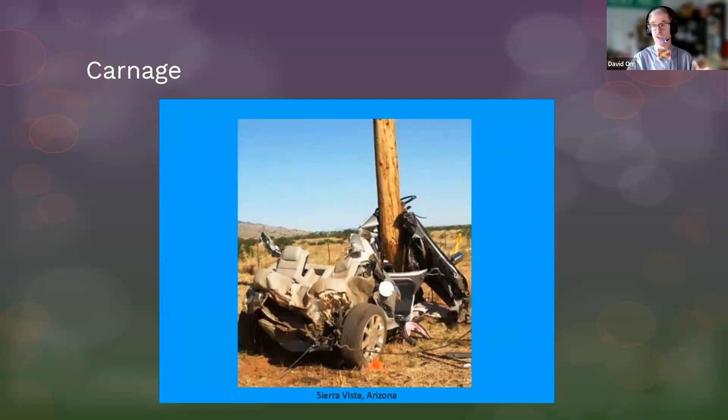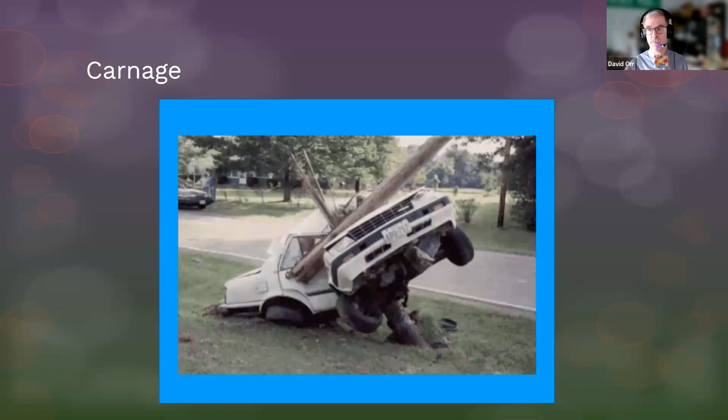And yet the funny thing is, or the sad thing is, depending on how you want to look at it, most of us don't think about this on a daily basis. And yet there are still people thinking about plane crashes that have occurred weeks and even months ago. We tend to focus on the big events, and yet these small events that lead to fatalities and serious injuries change people's lives, and the numbers aren't where we'd like them to be. So that's really the goal, everybody getting home safely every single day.

Now, if you go to both sessions, what are you going to be picking up and learning? Well, I'm hoping you're going to be able to describe the roadway departure crash problem, and we'll talk about why I've highlighted the word crash here in a minute. I want you to make sure you understand the concept of systemic safety. We're going to talk about other approaches, system-wide approaches, and hotspots and site-specific things, but the systemic safety one is definitely one I want to make sure is in your toolkit that you're aware of.

And then discuss the countermeasures to reduce the potential for leaving the roadway, which is our first choice. If the vehicle does leave the roadway, we want to reduce the potential for an actual crash. And then if there is a crash, we want to minimize the severity. Okay, that's our goals if you go to both sessions. Today, we're going to focus really on the first idea, but we are going to briefly touch on the others as well. And again, what's our number one goal? Everybody getting home safely every single day. That should be our goal.

You've heard the terms towards zero deaths or vision zero. There's other terms that are used out there, but they all have the same idea. Everyone should get home safely every single day.

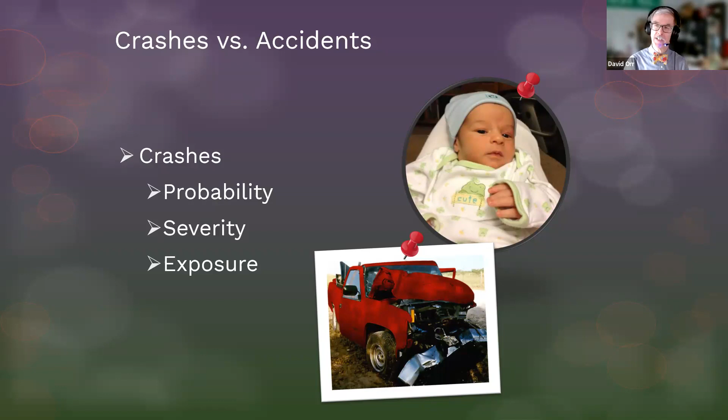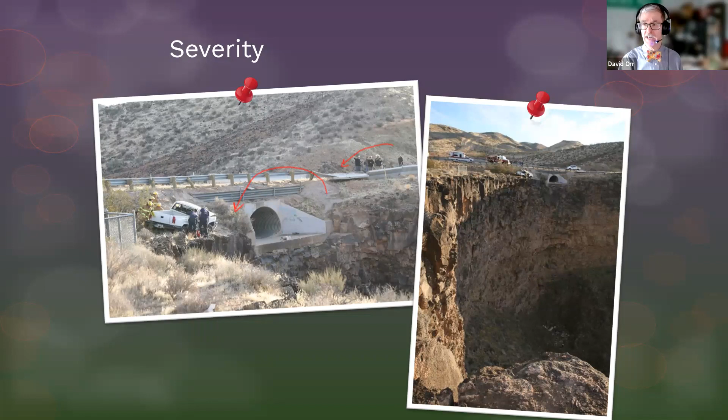Okay? And then finally, exposure. Exposure just means traffic. Okay? It really just means what the amount of traffic is. But the reason we say exposure is because it also deals with the fact that there might be people outside of a vehicle who, if they're involved in a crash, are much more likely to have a severe injury or fatality. So if there's pedestrians involved, workers, okay? I see there was another crash on 81 where someone hit an attenuator yesterday or the day before. Again, we worry about exposure, but it's a form of traffic that we're dealing with as well.

Okay? Now, what are we dealing with in terms of fatalities? Well, here's a sad map. It's a map I really wish I didn't have to show. It's the number of fatalities in the United States on an annual basis. Before COVID, that number had dropped down to almost 30,000. It was in the 31,000 range. That number has jumped to over 40,000 fatalities per year, and obviously the serious crash rate's even higher. And even here in New York State, we had a bit of a jump. So that average went up.

Okay. We want that number to be down. The real answer should be zero. We really want everybody to get home safely every single day. It may not be feasible. There may be reasons why not, but let's talk about what we can do to get that number at least back down to where it should be and headed in the right direction.

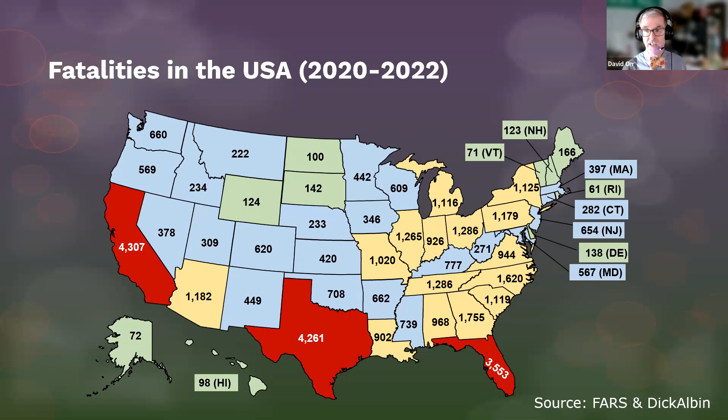Now, the Federal Highway Administration has a crash focus area that has not changed. I was at a meeting in Kansas City last week. There's not a change in that as far as the safety folks are aware. There are some restructurings, but they're still going to focus on roadway departures, intersections, and bicyclists and pedestrians, i.e., people who are not inside a piece of metal, that, if they're involved in a crash, are much more likely to have that severe event. Okay?

And this makes perfect sense. The reason for roadway departures has to do with percentages. Intersections tend to be a lot of interactions with bicycles, pedestrians, and the kind of crashes which are the most severe. And then finally, bicycles and pedestrians because of that, again, vulnerable issue. So what do we deal with in terms of roadway departures? Why did New York State put their first safety action plan in this area? Well, it has to do with percentages.

If you look at the number of fatalities that are due to roadway departures, these again are statistics from 2020 to 2022. Okay. So COVID and coming out of the COVID period. And as you can see, nationwide, almost half of all fatalities are roadway departure fatalities. Okay. And even in states like New York, which have a little bit lower percentage, partly because of a lot more pedestrian and intersection issues in the cities that we've got, it's still a pretty high percentage, 44% of the fatalities. So we'd really like that number to be down, and that's where we're going to focus.

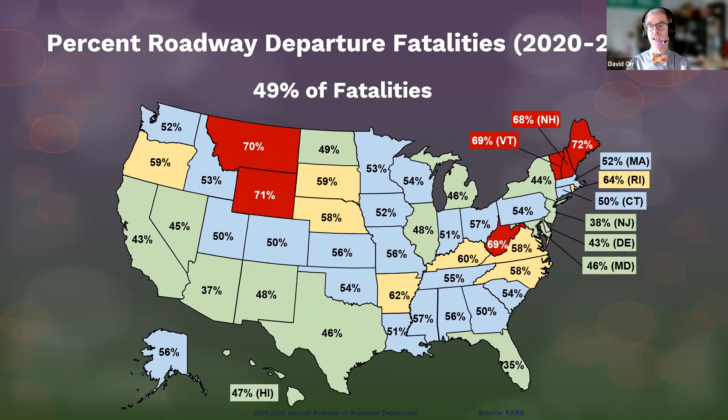So if we look at those data, now this is an interesting one. This chart, which shows the breakdown of crashes based on those three focus areas plus those that were not included for whatever reason, those percentages have not changed. I was actually stunned by this. I'm like, there's got to be something. I went through the data twice. The percentages have not changed within the numbers we were given. So in other words, even though more went up, they went up

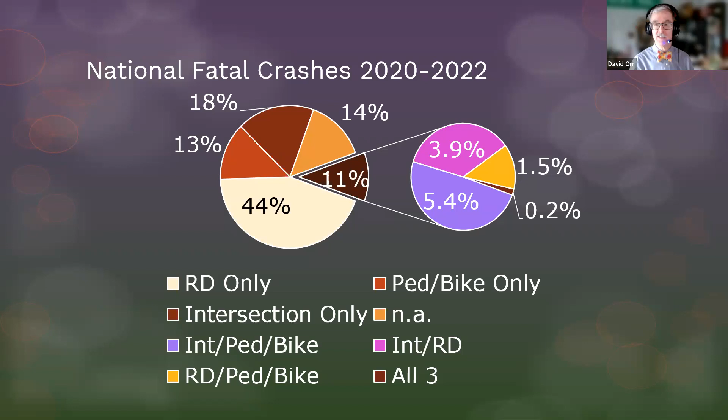So let me define it. This is a definition from the Federal Highway Administration. New York State is very, very close to this. Okay. They are moving to the same definition. It was different, more of a lane departure. But a roadway departure crash, per the Federal Highway Administration, is a crash in which a vehicle crosses an edge line, a center line, or otherwise leaves the traveled way. Now, on a multi-lane road that actually means that they move from one lane to the other in an uncontrolled way, by the way, just so you know. We're going to show you some examples of that here in a minute.

And if we look at the roadway departure fatalities, that includes head-ons, people crossing the center lines, rollovers where they go off the edge of the roadway, hitting trees, poles, barriers, other fixed objects, other roadside things that are not man-made. And then, of course, there are some fatalities which don't get classified. There's the classic other. Okay. Notice there are three really big areas that we care about. Okay. The head-ons, the rollovers, and hitting trees. But we do worry about other fixed objects as well.

So what does that mean by head-on? So this is a roadway departure crash that occurred in Arizona. Okay. So the person had a medical problem, and they wound up in a very, very severe crash. Nobody on the bus was hurt, but the person in the vehicle was severely injured. Okay. That is a roadway departure because they went over the center line and it was a head-on. Okay.

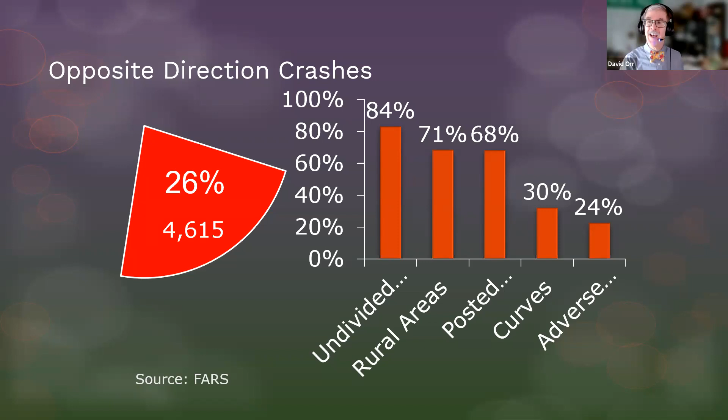Opposite direction crashes are something we want to focus on. Now, in terms of roadway departure, here's a roadway departure. Vehicle left the roadway. We'll come back and revisit this particular roadway departure a couple more times, but that's a roadway departure crash. They ran off the road into the snow and stopped, walked away. They left the traveled way completely, and they hit something.

If I say rollover, a rollover could occur going off the road or even staying within the roadway mostly. In this case, the person swerved a little too hard when somebody swerved in front of them, and they rolled 17 or 16 or whatever the number is times. I counted it once - let's just see, 1, 2, 3, 4, 5, a lot. But because of the vehicle they were in and they were properly seat belted, they walked away with minor injuries. Something to keep in mind when we come back to that in a minute.

A lot of times we might call that a lane departure, but under the definition we're talking about today, that's a roadway departure. Even if they'd stayed in the actual pavement, we'd still count that because it was an uncontrolled leaving of the lane.

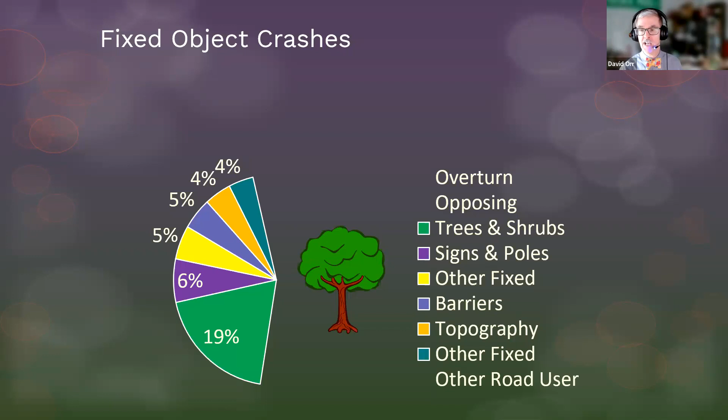The single most common struck object that leads to a fatality is trees. They're 45% of the fixed object fatalities, so we really want to focus on them. When we look at the statistics, like you might expect, two-thirds occur in rural areas, but one-third occur in urban areas. And it's not necessarily a speed issue. Now, it is a car issue, as you can see, about two-thirds with cars. But posted speed of 50 and above is about half, and posted speed less than 50 is about half. So low speed is not necessarily a guarantee with trees - if they're in the wrong place, even a relatively low speed can lead to a fatality.

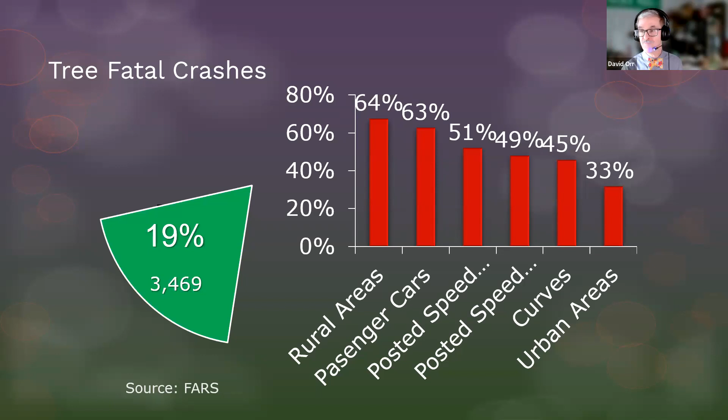And of course, as you'd expect, curves - again, a third of them occur in urban areas.

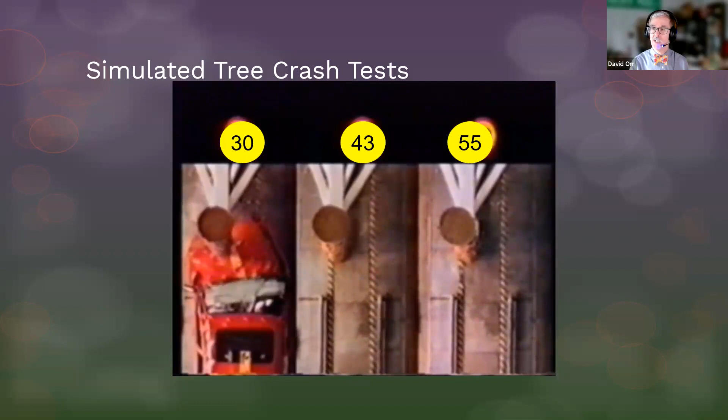So some simulated crash tests, and we will revisit this next week when we talk about some of the crash safety things we can do. But notice what happens - we've got three speeds. It was done in Europe, so the speeds are 30, 43, and 55 if you convert them to miles per hour - Sweden, if I remember correctly. Notice what happens in the penetration of the vehicle after it hits the tree. The reason trees are so deadly is because they're almost rigid when you hit them if they're big enough, and it can penetrate deeply into the vehicle itself. If you hit it at 55 miles an hour, you can see the penetration - it's well into the driver's seat.

My first boss when I worked at Yates County, before I came to the LTAP Center local roads program - I was the deputy over in Yates - my boss, who was the highway superintendent, once fell asleep and literally drove through a tree. Luckily, in his case, it was the right side, and he cut the car in half, and he walked away. Two feet to the left, he's not here with us. So that's how dangerous trees are.

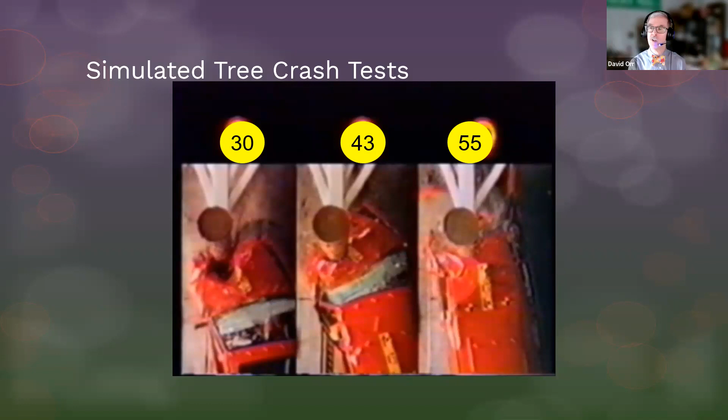So let me just ask, we can get you all working a little bit here. Have you ever been involved in a roadway departure crash? You can check all four of these - a head-on, it could even just be a side swipe, a rollover, some time you left the traveled way, or you struck a fixed object, and you can include all four. If you just left and ran into a snowbank, which is what I would be checking, you can check that. Okay, so let's see which ones you've got here. Actually, I guess I have a head-on too, actually, now that I think about it. And again, if you can't do it, you can put it into the poll, and then I'm going to show everybody's responses, and let's see what y'all came up with.

So we have three folks who've said they've been involved in the head-on. Nobody in a rollover - well, that's good. That's good.

13 of you, so it's over a quarter, have been involved in leaving the traveled way, and 8 of you have struck a fixed object. That's good, and it could be lots of different factors.

In my case, the one time I left the traveled way was on a slippery day. I didn't know it at the time, though. It was black ice. Best I could do was avoid hitting that fixed object, which is just a signpost, but

still, I didn't want to take the risk. These happen, and if I was to include your family or friends, I bet this number would go way up. So think about that. What have you had? What have you been involved with? And how many close calls have you had?

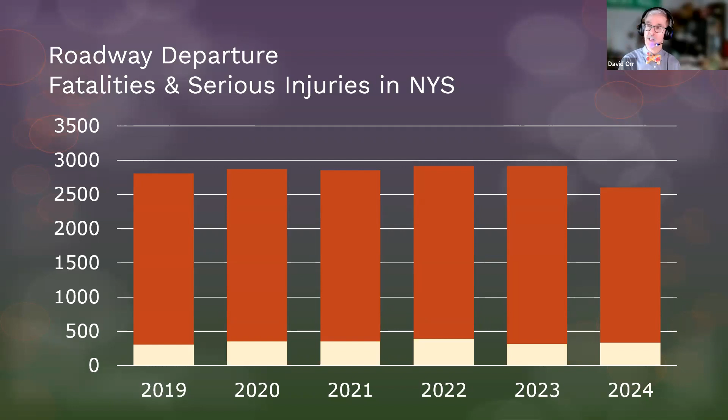So why would you say there's a focus on the KIA, or KA, or little k little a crashes? What would be your explanation if somebody asked you, why don't you get rid of all crashes? How would you reply to that? You can put those into the poll form. Let's see what y'all think.

Why do both NYSDOT and FHWA want to focus on the KA crashes? Yep, that's a priority issue. Absolutely, we have to prioritize something. And yes, if you minimize the KIA type crashes, you are going to minimize some of the others.

I've also seen KSI used. Not as often as you used to, but yeah. They're more expensive, they cost more for both society and for the people involved. If you've got limited resources, you want to focus where you're going to get the most bang for the buck. And like it or not, we can't protect against everything. We've got to focus on something.

It's economics. It's also a case of what we're willing to trade. If you asked me tomorrow, I could have zero fatalities and zero injuries, but everybody in the state would have at least one property damage accident once every 5 years. I hate to say it, I'd take the property damage accident. I'd be willing to have a little bit of fender benders to have people not have their lives uprooted and changed because of a severe crash.

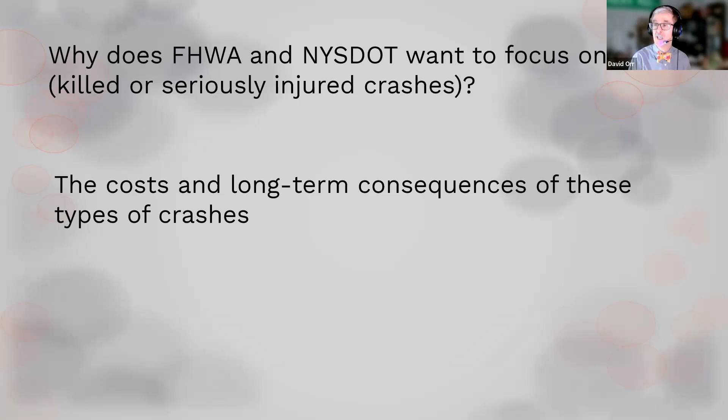And so we're going to focus on roadway departures because, again, it's the highest percentage. But I know the state is working on an intersection improvement plan, and we'll see how things go from there. But here's the concept: it's a circle and it keeps repeating.

So first, we want to keep the vehicle on the roadway. If you keep them in their lane, they don't cross over, you're not going to have a crash, or at least not a roadway departure crash. That's good. Then if they do leave the roadway, or start to cross over the center line, you reduce the potential for the crash by either redirecting them back or making sure there's nothing that severe to hit. A common thing there is having a good clear zone.

And then finally, they might hit something, but if they hit it and it breaks away, we minimize the severity of the crash. And this is a cycle because we're going to keep looking. As we get better and better at getting rid of the certain locations that have problems, we're going to focus on other locations as well. And that's the roadway departure concept.

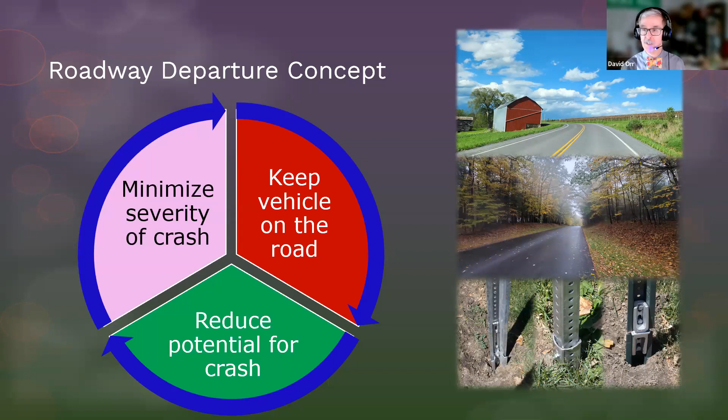Long before we put up rail, we want to think about trying to keep them in their lane. We can do that, we don't even need the rail. But that's not always going to be possible. So let's focus on a few thoughts here. First off, keeping the vehicle on the road.

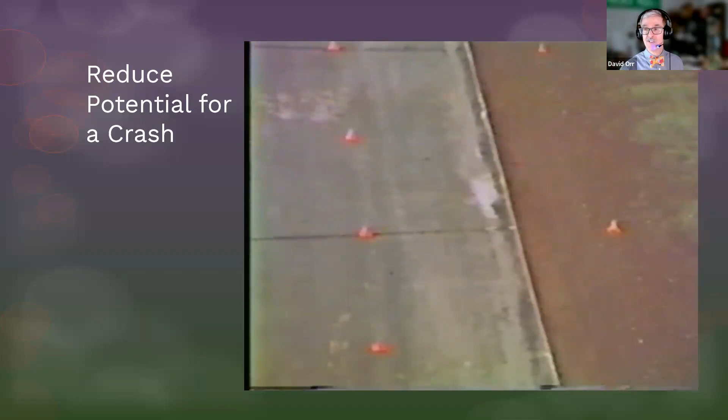That means good signage, good traffic lines, good friction, okay? Things like that that keep them where they belong. Next, reducing the potential for a crash: if they leave the roadway, is the slope steep? Is there a shoulder? This is a very common problem contributing to some of the most severe crashes—they run off the road, there's a bit of a rut, and they decide they have to get back on the roadway, and instead of coming back nice and smooth, they lose control.

This could have led to a fatality or a very serious crash had there been somebody coming in the other direction. It was a test case. And a lot of us have ridden off the roadway. You're supposed to slow down and then come back up slowly, but people don't always do that. So we will come back to the human factors issue a bit.

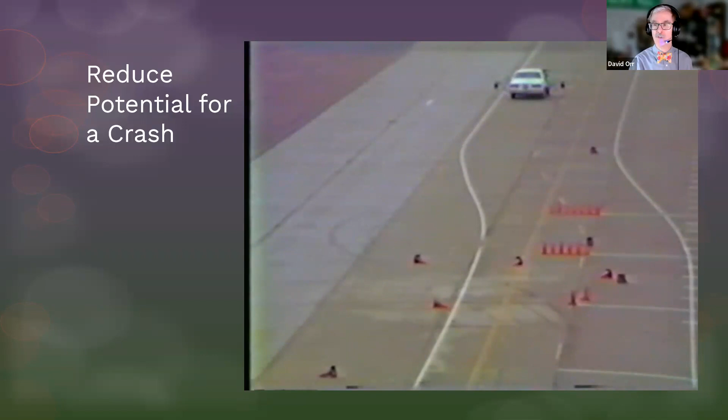We want to keep people on the road, but reduce the potential if they do leave the roadway or the lane. And then finally, minimize the severity of the crash. If they are going to hit something, we want them to hit something that causes at most property damage only.

We have a note in the Q&A, and again, please add your questions, I want your questions. It says, did New York State use the FHWA safety edge at the edge of the pavement and curbless sections? The answer is yes, it's in the state standards, and we will be talking about the safety edge as one of the proven countermeasures, both today and next Thursday. Safety edge is definitely something I would think about, and we'll talk about that quite a bit, because it's one of my favorite things that not enough of us are doing yet.

When I was in school, I learned the 3 E's. Then when I got out and was working in Yates County, it became the 4 E's. At one point, I've even seen as many as 6 or 7 E's. I think we just like adding acronyms. You can come up with bad acronyms if you want. But the idea of the 4 E's was that we're going to focus on things to make us safer.

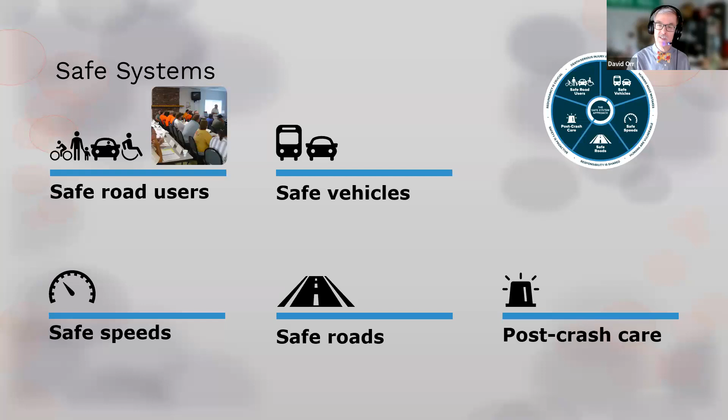Roadway, safe, yep. Safe users, safe speeds, post-crash care, drivers. Yeah, very good. And the word safe shows up a lot, as you would expect. Yep, nice job. And yeah, it's not in the 5 components, but that redundancy is really something we need to be thinking about, that we're not siloing things. We're looking at everything combined. And yes, it's called the Swiss cheese model for a reason. We can stop those Swiss cheese holes from lining up. We might eliminate things. So yeah, with safe road users, safe roads, safe speeds, post-crash care, and safe vehicles. It's really the 4 E's plus looking at the vehicle, but making sure we don't get in a situation where they get siloed.

Okay? So, what do I want to do for our last 15 minutes in this first session? Well, 12. Why do vehicles leave the roadway? Well, they leave the roadway for several reasons. It could be the roadway condition. It could be a collision avoidance problem, like a dead deer, not dead deer, almost dead deer runs out in front of them, a vehicle component failure, or driver error. Those are the most common 4 things.

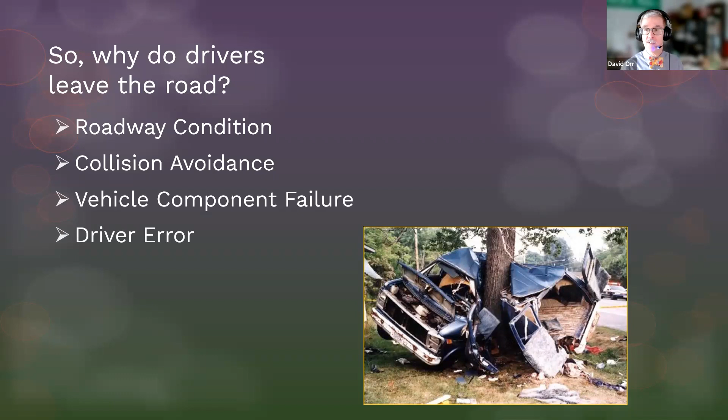Now, we can't always do much about collision avoidance, especially with wildlife. There are some things we can do, but not a lot. But there are things we can certainly do with the roadway, the vehicle, and the driver. Now, you've probably seen a version of this particular chart I'm going to show you, a Venn diagram that talks about crash factors. And if we look at the highway, the vehicle, and the human factors, you've seen this Venn diagram in different formats. Now, I'm going to show you the Venn diagram, but I want you to please understand it has a serious fatal flaw.

About a quarter of the time, a little over, 28% of the time, the human was part of the equation. So maybe the road was a little too slippery, but they were going a little too fast for conditions. Okay? Almost 60% of the time, it's just the human. We did our job as engineers, at least according to the standards, and that's the key why this has got an issue. But there still was a crash.

About 6% of the time, it might have been the vehicle. Maybe their tires were bald and they were going too fast. Only 3% of the time is it the vehicle itself. And then, of course, the vehicle on the highway might have an issue as well. And then there's a small percentage, about 3%, that sort of everything gets involved. And so if we add all these numbers up, the vehicle is involved only about 13% of the time, the highway just about a third, and the human factors is over 90%. 90% of the time, there are human factors.

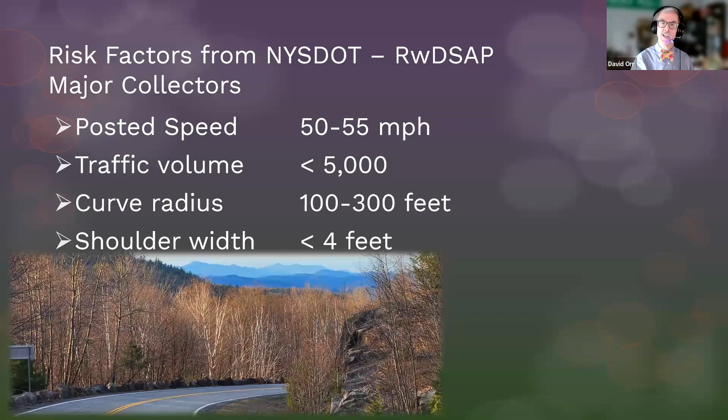But let's just ask you, just in the back of your head, what are some common risk factors on your roads and streets? If you were just going to make a list, what would you put down? We'll put a Wordle together here. What are some common risk factors on your roads and streets? And again, if you can't access the poll, you can throw it in the Q&A. The width on the shoulder, trees, ramps that are short. Yep. Okay.

Somebody put over into the Q&A speed. Yep. Speed is absolutely an issue. That's a risk factor. Blind corners, polishing of the stone or a slippery surface. Yeah, could be an issue. Potholes, people being distracted. Okay. You can make a list. In fact, it's a good idea. You're making one now. Do it with a team. And you probably come pretty close. And then we recommend you go out and you get some data to confirm these things and find out whether something is really critical or not. It may or may not be.

When we've looked at roadway departure plans, local road safety plans that have been out there, there are some common issues, and yes, aggressive driving is part of it. Speed is definitely an issue. Traffic volume is an issue, especially from an exposure standpoint. Lane width, of course, makes a huge difference. Is there a shoulder? What is the width of that shoulder? What is the clear zone? What do we want for a clear zone? What are the trees? Where are the trees? Curves and their associated radius.

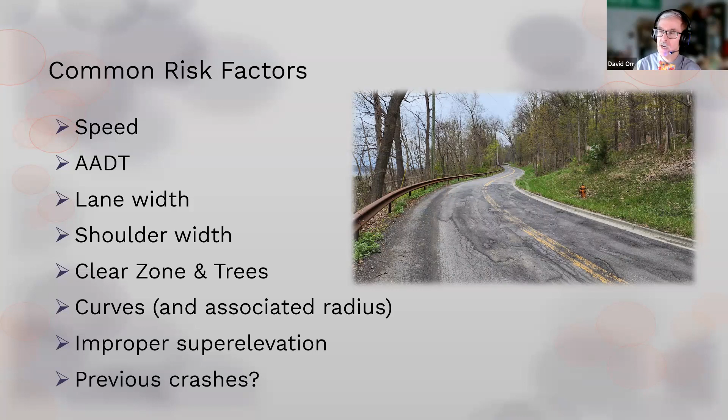Now, we're going to end our last little 5 minutes here, take our break at the bottom of the hour, talking about something called crash modification factors. These come from something called the Highway Safety Manual, okay? And the CMF Clearinghouse, which we'll look at here in just a second. We're actually going to open it, just to show you the website.

You may have heard the term accident modification factors. It's an older term. It's the same thing. Again, we just changed from accident to crash. So crash modification factors account for the difference between the old and the new geometry. They use other terms like the base geometry and stuff like that, but essentially they've calculated out the math behind what happens if you do X, Y, and Z.

Widen the shoulder, flatten the slope, put up rail, things like that. These are modification factors. And the cool thing is there's estimates for the individual effects, and then there are formulas, if you really want to get into it, that allow you to combine things together. There's some techniques involved in that, but a lot of times we just start with a simple single improvement and see what happens. And then if the number is less than 1, you've lowered the crash frequency. If the number is greater than 1, you've increased the crash frequency.

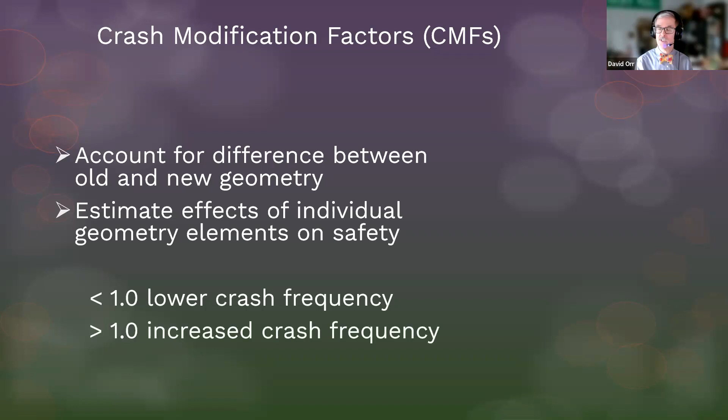Okay? So how does this work? Well, if you have a crash modification factor, you multiply that times the time you're looking at, which is typically 1 year, but could be multiple years, like 5 or 10, times the crash rate, which is the current rate of crashes per year, and you're going to get the new crash rate. So you can compare the old to the new.

Okay? So raise your hand if you think a CMF of 1.1 is good. Please don't raise your hand. Nobody raise your hand. That's good. Except there's an asterisk there. Again, the crash modification factors can look at just fatal and serious injury crashes. They can look at specific types like roadway departure crashes. They can also look at all crash types.

And if you got a CMF of 1.2 for all crash types, but your CMF for fatal or serious was 0.5, I'd take that in a heartbeat. So yeah, normally it's not good, but what are we trading? What are we trying to do? So it's a caveat. No in general, but there might be exceptions when you look at specifics, and the clearinghouse does have that.

So you may also hear the term crash reduction factor, which is a percent reduction that might be expected. It's not different. It's just the crash modification factor subtracted from 1. Okay? So therefore, if it's a positive number, crashes go down. If it's a negative number, crashes go up.

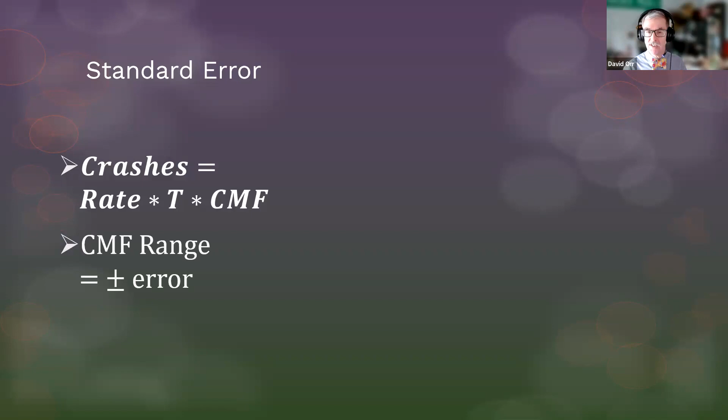Because crashes are the rate times time times the CMF, the crash modification factor. But there's an error involved, and that range comes back to that old statistical curve, that Gaussian curve you've talked about. It may not be perfectly Gaussian, but it's close enough. We just want to make sure we understand there's an error involved. None of these things are perfect, okay?

So the most common thing you see, and if they never say it, by the way, in all the studies, whether it's a poll of political people or they're talking about opinions about tomato soup, they don't say it, they're assuming 95%. So what we've got is a little bit of a tail at each end we can ignore, okay? Yeah, we could get a weird situation, but most of the time we're okay with that.

And so the technical way you would do that is you do something called the normal statistic or Z statistic, and the value at the 95th percentile is a multiplier of 1.96. Gotta get my calculator out. But if I just round that to 2, it's a little conservative, and it's something I can probably do in my head. So what does that mean?

Well, the range then becomes the crash modification factor plus or minus 2 times that standard error for the CMF value. So the crash rate then has a range to it. There's the middle and there's the range.

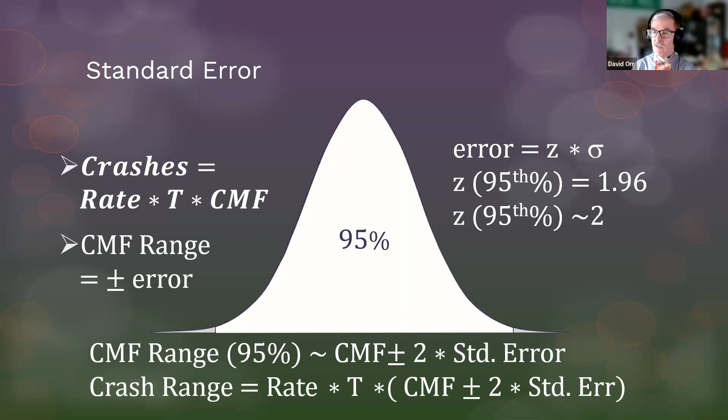To illustrate this, let me just show you an example of something that's replacing heavy post with weak. When we talk about rail systems later on, we'll definitely talk about the fact you'd like to use the lightest rail system possible that will do the job.

So definitely an improvement, may not be all the way down to 17, but it's still definitely an improvement and probably worth it from a return on investment standpoint, even just reducing a few serious crashes.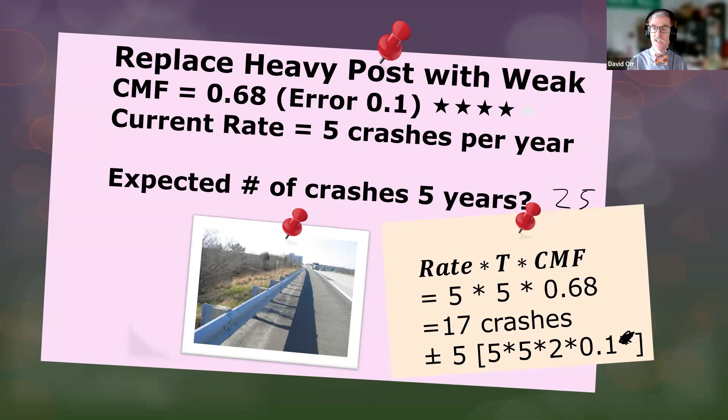It is possible it could go up in terms of serious and fatal crashes. Why do you think that might be? I mean, just think about that. What could happen? Hey, I flatten the slope and I remove the rail. That should make it safer.

But what's at the bottom of the slope? Did you flatten the slope enough? Is it a situation where it's on the outside of a curve and that flat slope isn't quite as beneficial as you might think? And so that's why, if you're looking at the CMF clearinghouse, you can use them, and I'll show you some examples later on, but just be aware of the fact there might be an error.

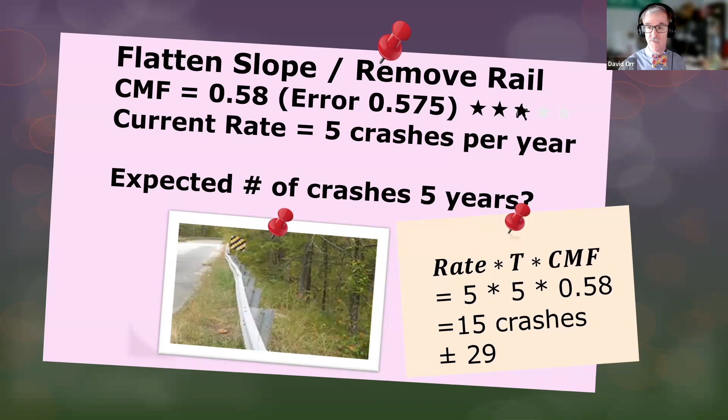So let's just do a quick review of what we've got. I won't make you type this in, but just think about defining a roadway departure crash. Put that answer in your head.

And the answer you should have had is a crash in which a vehicle crosses an edge line, a center line, or otherwise leaves the traveled way, i.e. uncontrolled changing lanes.

Those lead to bad crashes. That's why it's a severe thing we care about. And what type of crashes are included in this? Well, again, pretty much any crash where you leave a lane. That includes your head-ons, your rollovers, your trees, your poles, your barriers, your other fixed, your other roadside.

Now this one I am going to make you do a poll. What's the most deadly fixed object? What's the one that's got that 19%? Is it guide rail, utility poles, trees, embankments, or none of the above?

Yeah, that's a pretty easy one. But remember, rail, utility poles, and embankments are considered deadly. It could be objects, maybe not a fixed object because of the embankment, but the point is there are risks, and we have to think about balancing those up, okay? Because it's trees by far. About 45% of all the crashes that occur when you hit a deadly fixed object are because you hit a tree or a big shrub.

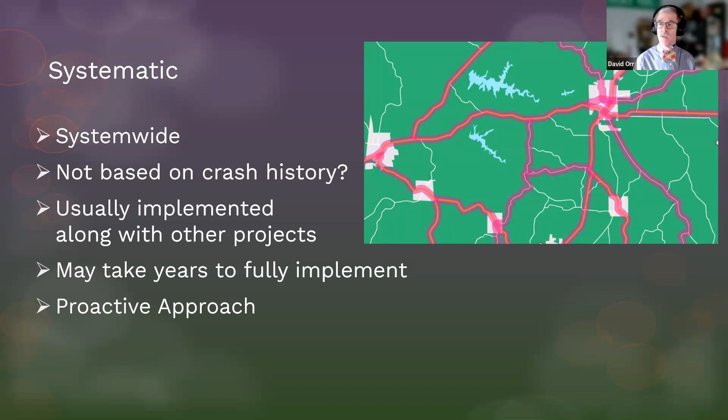So, time for a poll regarding the systematic or system-wide approach. Name a policy, type in a policy implemented by your agency. I'll let you do that for about 20 seconds before I start showing the results. Give you time to put a few in. Let's come down here and start looking at your responses.

Wrong way signs on on-ramps. Yep, could be something at the shall level in the Manual on Uniform Traffic Control Devices, but yeah, a policy. Vision zero, we want to get to zero deaths. Grade separated bike paths. Using heavy post blockouts above the traffic volumes above a certain amount. We can talk about that when we talk about reflective edge lines.

6-inch edge lines on a rural road, versus 4-inch, which is the standard. We will talk about that actually as an example of something that has a pretty good crash modification factor to it. Rumble strips. So these are policies that you might implement in your particular agency.

So I'll let you keep typing those in, but let me just ask: what is the risk of creating a policy or standard operating procedure? Can somebody give me in the Q&A - in this case we won't do a poll, we'll do it in the Q&A - a reason why that can actually be risky? What's the risk of creating a policy or standard operating procedure, a system-wide or systematic approach? Give me an example, either an example of a policy which led to problems, or why it's risky.

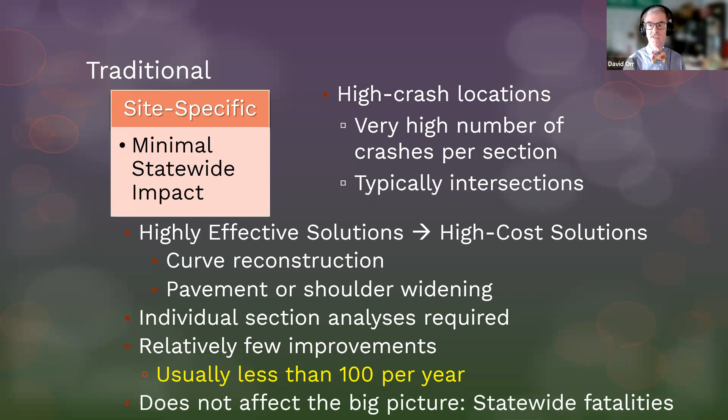So it may not affect the big picture, the statewide fatalities and serious crashes. But it is something we like to do. We've done a lot. But remember, if you do what you've always done, you'll get what you've always gotten.

So we need to do hotspot analysis, and we definitely want to focus on the hotspots. But, and this is actually good news in some respects, we've actually done a pretty good job of catching the worst hotspots. There are still a few, and if you look at the Roadway Departure Safety Action Plan, there's actually some charts and some online data that's available, so you can find the hotspots due to analysis that was done in the state system. So there is value in having this approach.

Now, I'm going to map crashes in the southern tier. I also have one I could show you from another location. We're going to do another example in a minute, but this is one I've shown before in the southern tier. Fatal crashes in 2012 to 2014. And there are the crashes. I'm going to go back one and highlight it up.

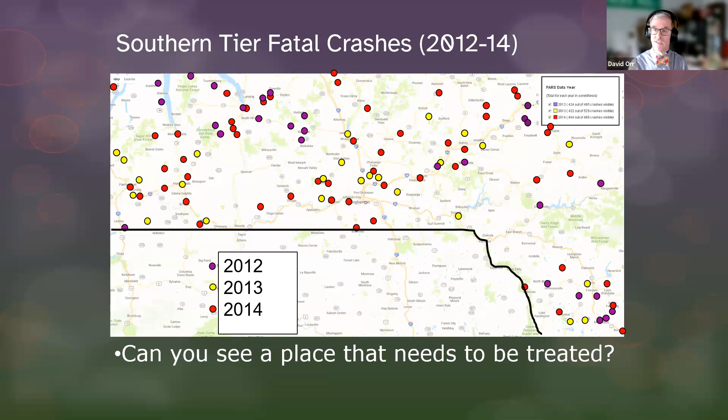Just think about, do you see a place that needs to be treated? Can you think of a place on this map that would need to be treated? And when we do this in person, we have people point and we do a circle and stuff like that. And I could do that here. I can get my pen out. Let me get my pen out and pick a color that, let's see, I'm not using blue. I'll do blue.

You might go, well, there's a couple that are close here near Ithaca, and there's a couple that are close here, not too far south of Bainbridge. But every one of those dots, even if they're touching, they're half a mile apart. Now, if we added in the serious injuries, we might start seeing some possible hotspots, but it may not be as many spots as we think. But there's still going to be crashes.

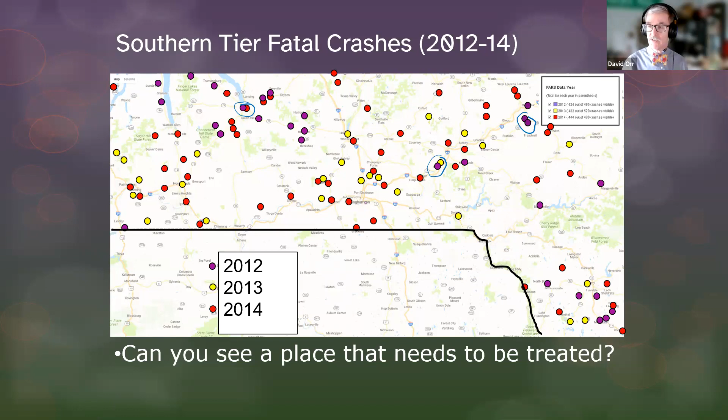So we have these crashes, and there's a couple that look relatively close, but if you actually look closely at them, you'll see they're not that close to each other. Even the two that are overlapping are, again, not in exactly the same curve. They're not quite as close as we might think.

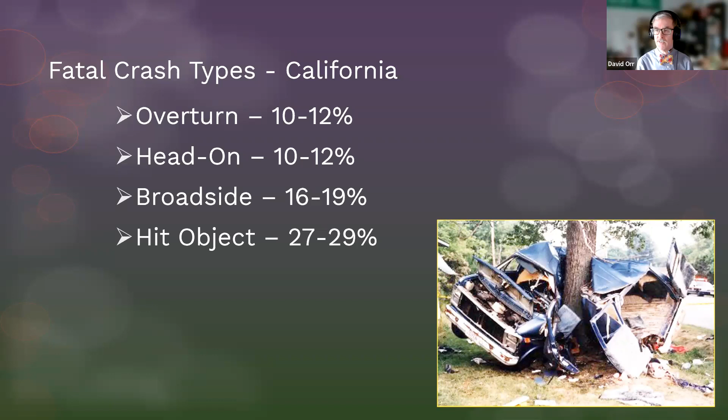The locations tended to not be in the same place, they varied quite a bit. But the numbers were pretty consistent, percentage-wise and total-wise. So this is the idea behind systemic safety: we're getting a randomness to it to some extent, not completely, but to a limited extent. And when there's a higher probability of a crash, higher risk, we will do something.

So let me illustrate this with what I'm going to call the virtual dice rolls. We do this in person, we'll actually give people a piece of a die, but what we're going to do here is a virtual die roll, and I'm going to pull out my little computer here, we call that a cell phone these days. And I'm going to come in here and put in a random number. Oh, my random number generator was being persnickety. Okay, generate.

So everybody, choose a number - I've already chosen it. Choose a number between 20 and 25, put it in your head, write it down, whatever you want to do to keep it so you don't forget it. Now choose a vowel: A, E, I, O, U, and Y. Everybody got that in your head? Okay, so our two chosen random dice rolls are 24 and O. Raise your hand if you got 24 and O. Raise your hand if you got 24 and O. Nobody raised their hand.

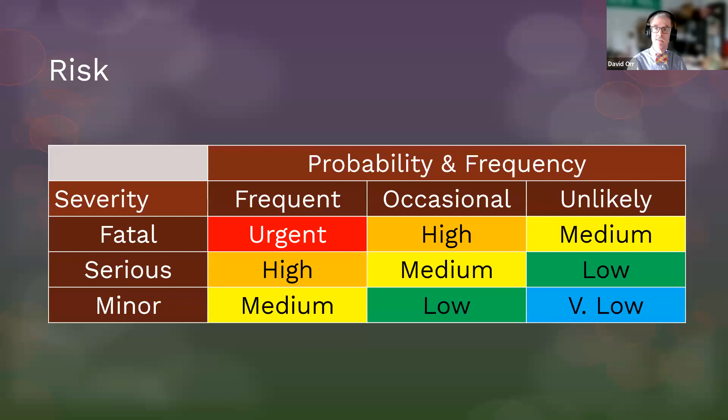Okay, I got one person raising their hand, two. Okay, I'm going to lower everybody's hands. Actually, Amanda and Jody are going to do that for me.

Now raise your hand if you would fix the one on the right first. Yeah, that's what we want to put our money onto. And I can't argue with you if I don't know enough of the facts. That's why facts are so important. Does it make a difference? I'm going to lower everybody's hands again. Does it make a difference if I tell you the traffic volume on the left is 6,000 plus? It's actually about 8,000 these days. And the one on the right has a traffic volume under 50.

So let's ask the same question again. How many of you would do the right one first still, if the traffic volume is 8,000 versus 50? Yeah, a lot less. I'm not saying you don't want to do something there, but the exposure is so great on the one on the left, even though it's got a wide shoulder, there's just so much more traffic. It still leads to serious crashes. You might need to do something there first. And you have to think about balancing those.

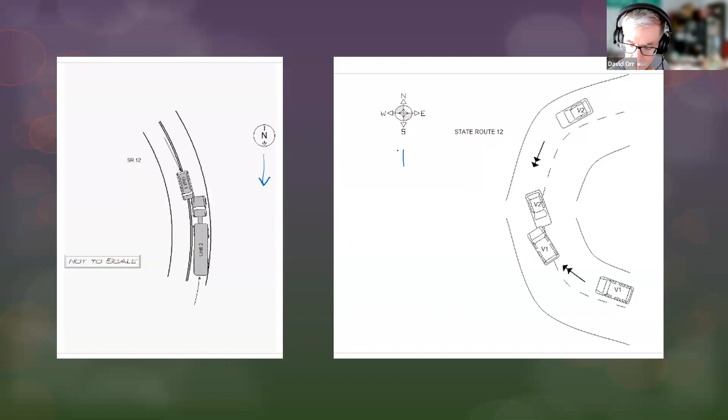Now, they look like different curves. Just make sure whenever you look at these reports, you get a sense of what they did. In this case, they put the north arrow going down on this page and up on this page. And that is actually the same curve. Okay. Is that a hot spot? Two crashes? Maybe, maybe not, but it's, again, a risk factor to think about.

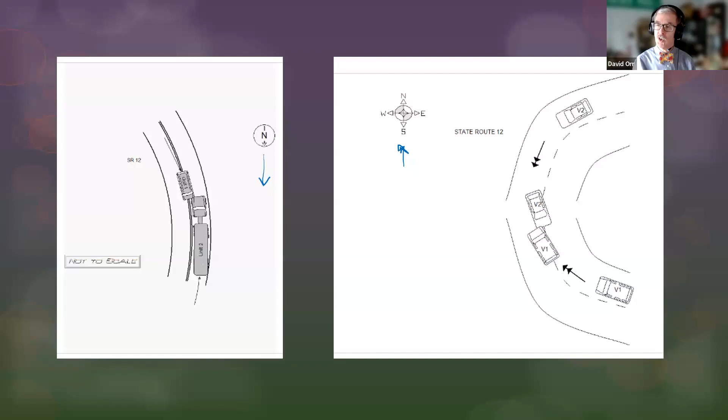Maybe there was or wasn't a rumble strip. Maybe the lane is narrow. Maybe the curve radius is involved. You're going to have to go get that, but at least you now have a chance of doing that. And you can develop what are called crash trees using CLEAR. It's a pretty cool tool. In this case, it's really just more of a big arrow for me.

But here's some data. This happens to be St. Lawrence County instead. There were 85 serious crashes over a 5-year period, or is it 10-year period? Sorry, in this particular case. And you could break it down by things like traffic volume and speed, which are available, okay? And then whether it's on a curved or a straight segment, that's based upon data that's recorded in the crash reports. And you can add them all up, and you'll actually see that high speed, at least 35 miles an hour, is 95% of all crashes that were serious and fatal.

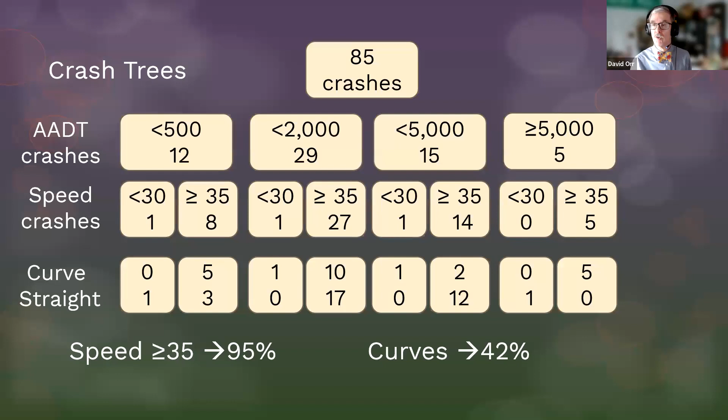That makes some sense. And curved, 42%. Wow. Not quite half, but a lot of them are near curves. So if we were going to start focusing, we might want to start focusing on our curves and see what we can do there. And of course, you're going to be using proven solutions, and we're going to talk a lot more about proven solutions after our next break, and of course, next week on Thursday.

And you can just imagine the kind of different things that are out there, everything from curve-related or roadway departure-related things such as markings and safety edge and rumble strips, to intersection and pedestrian bicycle issues such as crosswalk improvements, roundabouts, and even signals. There's a whole list of them, and we'll talk about those a little bit more after the break. You're then going to have to implement the solutions.

And remember, if your solution doesn't have buy-in from a stakeholder, it's going to be hard to get it implemented because, like it or not, there's not always acceptance of some of the solutions that we come up with. Okay? But a good solution can go a long way, and maybe you have to try a few things.

In this case, this is handbell music. I play in a handbell choir. And if you want to flip pages, one of the best tools is Post-it notes. Okay? But you got to get buy-in. People at first are like, how's that going to work? But once you do it, most people don't go back.

Now, of course, you have to be able to pay for all of this. There has to be money, whether you're going to do it with your own budget or you're going to go get a grant. How do you do that? And then later on, are you going to be able to maintain it? So the capital cost is important, but also the maintenance cost later on. If you put down stripes, for instance, are you going to be able to maintain those stripes year after year?

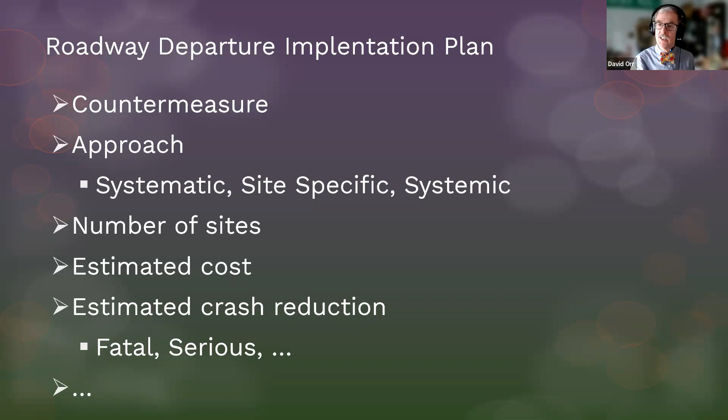When you're getting done with all of this, what I want you to understand more than anything else is there needs to be a plan focus. Most plans are going to tend to focus on either the risk factors - so a systemic approach in overrepresented crashes - or they might look at locations, intersections, corridors, a data-driven kind of approach. This would be especially valuable if you're trying to also incorporate hotspot kind of analysis, so you do a hotspot plus other locations, especially corridor type analyses. Maybe you do arterials and collectors first - makes perfect sense when you think about the risk reward kind of thing.

Or you could even just pick a countermeasure, especially if you're doing a systematic approach. You pick a countermeasure such as safety edge, such as stripes, such as improved signage, which is what those folks in Humboldt County did, and they cut their crash numbers down 80%, just putting up signs, not even markings, just signs. And so you wind up with a comprehensive report that maybe actually has a little bit of all of these in it.

Okay, so I'm going to give you an example. This is a completely fake, and yet it's not fake example. Just to keep it small, I was thinking about trying to do the one from Chemung County or Wyoming County that I was part of, or even the St. Regis study that was done, and I couldn't fit it on the screen - they take a little bit more than I can show you. But what I could do is quickly go look at the Cornell Central Campus and just pull some quick data and see what I could come up with.

Now, who the stakeholders would be might be slightly different if you're looking at more of an urban core, though I will admit, I think the best plans typically include multiple jurisdictions. If I was going to do one here in Tompkins County, I would include all of the agencies in the county. Oh, they just released the public version of such a report - it's actually one of the links available to you, for all of Tompkins County, including the city of Ithaca. Okay, but you develop your stakeholders and then develop your risk factors using data. And I just went through and made some risk factors, the kind of risk factors that we talked about.

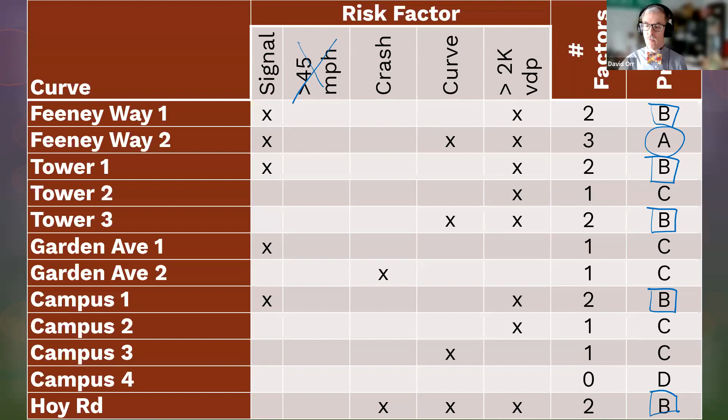Now, when you're developing a plan, you're probably going to have more levels than this. But the idea is don't try to get to the point where you're saying we have to do this one first and this one second. Give yourself some flexibility. And there may be a road that just doesn't show up from a safety standpoint.

But if later on you're working on a stretch of highway, it's a good time to look at individual issues and see if there's something you can improve, especially if you're already applying a proven countermeasure on the next segment. So it's something to keep in mind.

And then, of course, you would match the countermeasure to the risk factor. In this case, it's a more urban area, so maybe some curve delineation or improvements, maybe some crosswalk improvements, maybe even looking at the signals might be something worth implementing. You're probably not going to be implementing clear zone or safety edge because there's curbs. You're going to match the countermeasure to the solution.

And of course, the challenge with all of this is you got to have the money, you got to implement the solutions, you got to get everybody on board. And that can be part of the challenge. But what I don't want to have happen is we spend all the time and effort to create a lovely report, and then it just sits on a shelf gathering cobwebs. So a plan is not a plan until you're implementing something.

Okay, so let's do a quick review of our session 2, and then we'll come back and talk about proven countermeasures. So a couple of quick things for review.

Do you remember the 4 implementation strategies? I'll let you type those in for me. What are the 4 implementation strategies? Okay, let's see what y'all came up with.

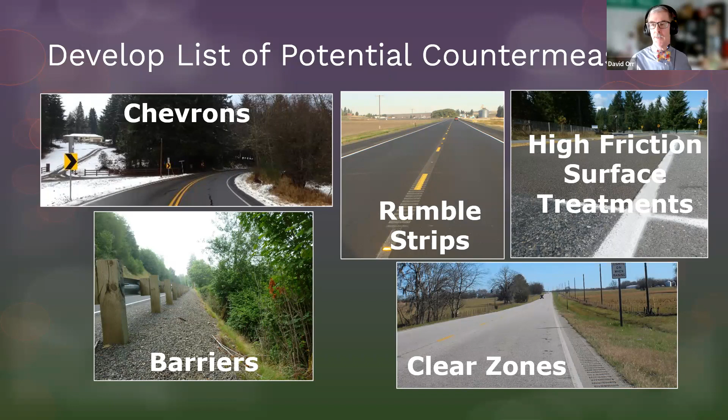That includes everything from chevrons and rumble strips to high friction surface treatment, clear zones, and barriers, whether you call them guide rail or guardrail. By the way, if you ever search on the CMF clearinghouse, make sure you look for both guide rail and guardrail, because they come up differently in the searches. Try different words. But let's develop a list of proven countermeasures — again, we can go crazy looking at the different choices, but I don't want to reinvent the wheel.

I want you to know there's actually a lot out there that you can use. The two places I would have you start with: one is the FHWA's Proven Countermeasures booklet, which is highlighted in the handout we have for today, and also in the Combating Roadway Departures workbook. And there are subsets of that.

For instance, this one is specifically put out by the FHWA for roadway departure countermeasures. Again, it's a highlighted thing. These tables exist for different purposes—they show you the kind of crashes they work with, the expected cost, things of that ilk. So these are tools you want to think about using.

We're going to talk a lot more about the specific ones for roadway departures as part of the session next week. As for the list of proven countermeasures, FHWA—if you're getting certain funds like Safe Streets for All funds—you need to be choosing from that list. So to be eligible to get money, they need to be from that list, and they have a link of the 28 proven countermeasures.

I just want to sort of review those with you over this hour and highlight where some of them might be used, especially in the combating roadway departure world.

Now let's just see if anybody remembers—I'm making you go back, I know, an hour. What are the three FHWA crash focus areas? Do you remember what those three crash focus areas are? Actually, it's an hour and a half now that I think about it. Intersections—that's good, that's one.

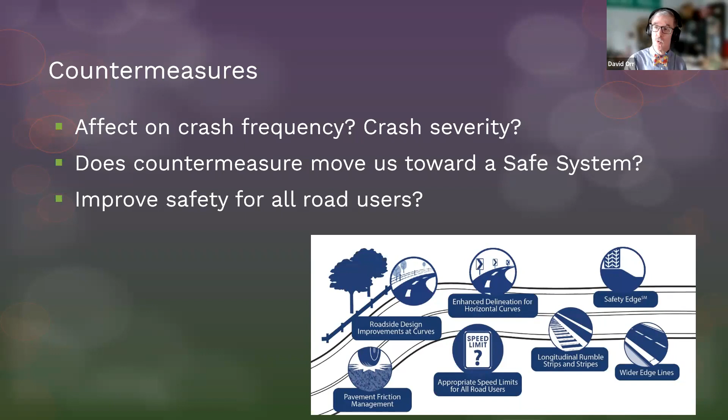Which means you need to be thinking about all road users—that includes your drivers, your buses, your trucks, your pedestrians, your bicyclists, your road workers. I'd put them in the top 5 of my list, top 2 or 3 even, because they're out there working—really important people. Anything we're doing should include them as well.

If you're going to do it, how are you going to pay for it? If you want to get a grant, is it eligible for funding, or do you have to do it with local dollars? And then maybe the single most important question when deciding on countermeasures is: can you maintain it?

When we talk about rail systems later on, we'll mention cable rail. I will be completely honest—a lot of small agencies, I don't recommend cable rail to them. Even though it has the best deflection distance and real value, if you can't maintain the turnbuckles, if you can't keep the cables at the proper tension, should you be putting that kind of system up, or should you look at a system that's less demanding in terms of maintenance?

And then, of course, what types of projects are you going to do these countermeasures as part of? Are they self-standing safety projects, or do you do it as part of a paving project, like a safety edge, or putting in new signage as you're doing a reconstruction or rehabilitation along a roadway?

Okay, so keep that in mind. Whenever you're doing these things, it doesn't take that long to go to the CMF clearinghouse and do a quick search. But remember, if you're not going to read the report, choose the ones with the 4-star or 5-star value, and then just check that error out a little bit. It doesn't take long and it's definitely worth doing.

Some of the reports from FHWA have already done some of that work for you, and the ones that are selected are the ones that are the high value, low error kind of repairs.

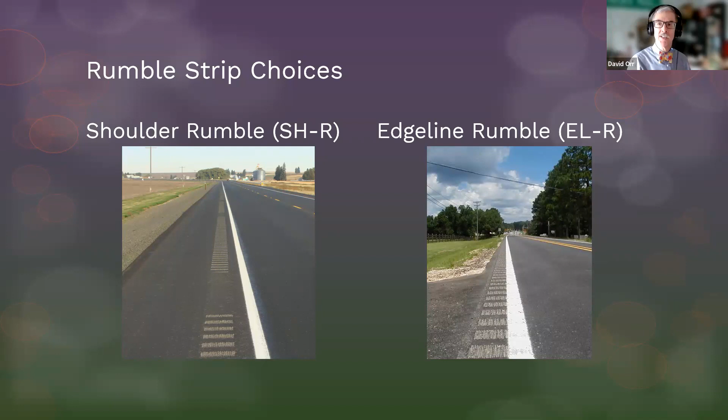Somebody in the Q&A, tell me where you might not want a rumble strip. There are about 3 or 4 reasons why you might not want one. Maybe be careful in a bike route—now there are ways you can have bikes and rumble strips work together—but maybe on old, deteriorating pavement you don't want it. That's a good example. How about in a residential area? Some people don't put them in residential areas, or don't put them in certain communities. Maybe you want to go to a mumble strip in that case, and we'll talk more about that next week. But there might be a situation where there are places in your community where you don't want a rumble strip.

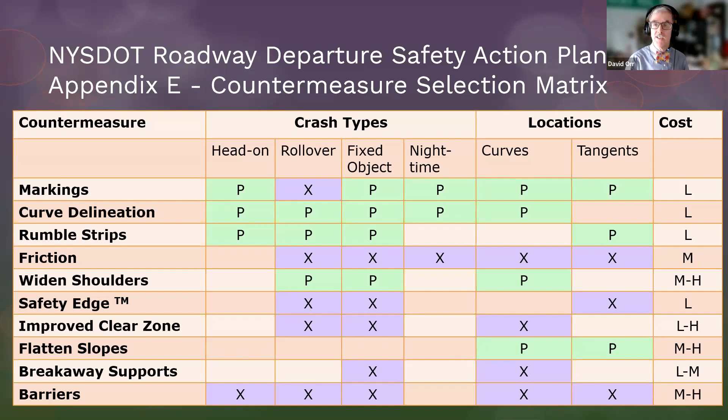And they added in the chart the DOT did whether they're valuable for nighttime crashes as well, because we know nighttime is an issue for those of us whose eyes are getting a little harder to see at night. So which proven countermeasure? Well, that's the cool thing: we got a whole selection, more than 24, and we get to choose from them. But again, you're probably not going to implement all 28, so you need to decide which are most applicable for your agency. If you're with an MPO or a consulting firm, you probably need to think about all of them, but some are not going to be applied in certain situations.

So what I want to do is go through them, but just to start us off, I've given you a list of 8 proven solutions that we know have been used in New York State. That includes pavement markings, delineation for curves, rumble strips, safety edge, improvement in the clear zone, crosswalk improvements, roundabouts, and improved signals. Which of those have you actually implemented? Which have you or your agency used? Or if you're a consultant, you've been involved in a process where it was designed and used. So which of these have you used?

Let's see what y'all come up with. And there are 50 of you on the call, so I'm hoping we get a large number, and you should be able to select more than one. So I should be able to get a lot more than 50 votes. You can select more than one. We'll give you another 20 seconds to see if anybody gets above at least half of you. It's probably like a lot of us, you're not voting.

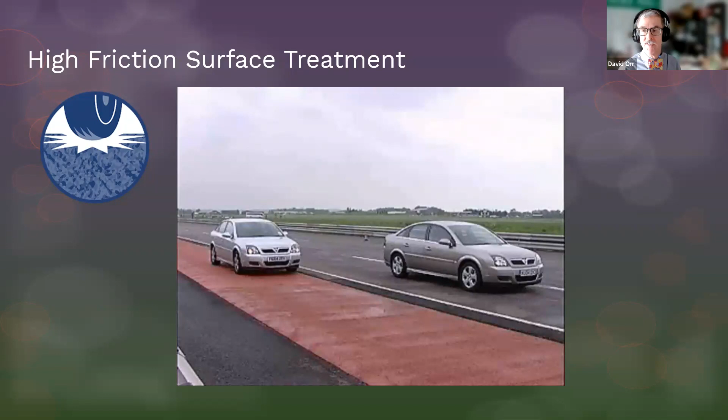Delineation for horizontal curves is something that everybody should have in your bag of tools. So how many of you have been involved in delineation on curves? That means chevrons, warning signs, all that fun stuff, even stripes. Please raise your hand. Everybody probably should be at some point in their career. As we'll talk next week, this particular technique has some of the best crash reduction factors and really even better cost-benefit ratios, tremendously high benefit-cost ratios.

The biggest challenge is if you put something down, can you maintain it? Okay. So can you maintain the center line and the edge line if you're a small agency? And even for a large agency, how does it survive the winter? But delineation makes a huge difference. In fact, there are some requirements in the Manual on Uniform Traffic Control Devices that you need to keep in mind. Okay, certain types of road that have to have this. We'll get into the specifics of that next week, but I just want you to make sure you're aware of that because delineation makes a huge difference in keeping people in their lane, getting them around the corner. And if they're in their lane going around the corner, guess what?

We don't have a crash. Good thing.

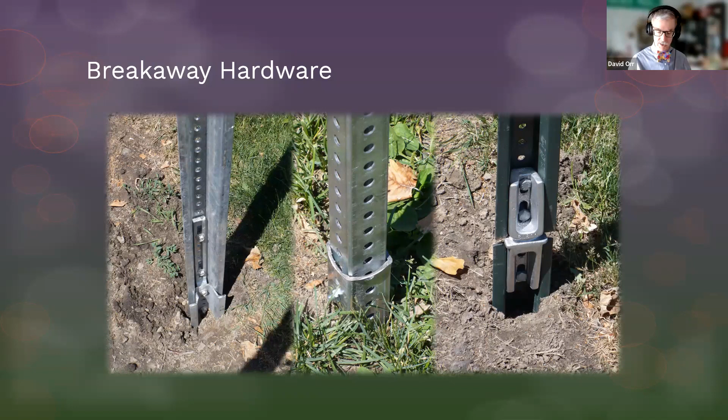And so having a striping program can matter. So does anybody here know—raise your hand if your agency has a striping program, that you've got a plan, a policy in place. Raise your hand. Again, you probably want to have one, because once you put them down, you've got to be able to maintain them. And that's pretty important.

Didn't want to cough on you.

I did mention I was going to talk a little about wider edge lines. We'll talk more about this next week when we get into the details. But the crash modification factor is pretty high, 0.78, about a 22% crash reduction for serious crashes just by going from a 4-inch to a 6-inch edge line. Not a lot extra cost, because you're really only paying for the extra paint. You're already running the striper down the road anyway, but you get a reduction of 20%. So something to think about on your higher volume roadways. You have to think about the cost, but it's something to deal with.

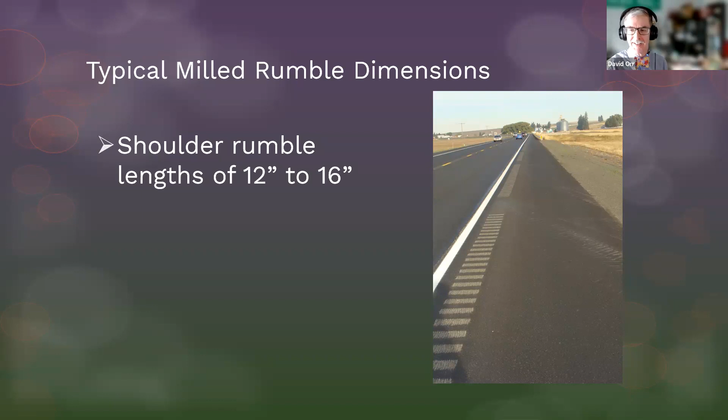The edge line ones that aren't as wide, like we talked earlier, those are only 8 to 12 inches. And heck, people have put down 6 to 4-inch ones. They have their place. It's the old saying: do what you can with what you've got where you are, and a substantive improvement may be better than trying to go full hog if you just economically can't do so.

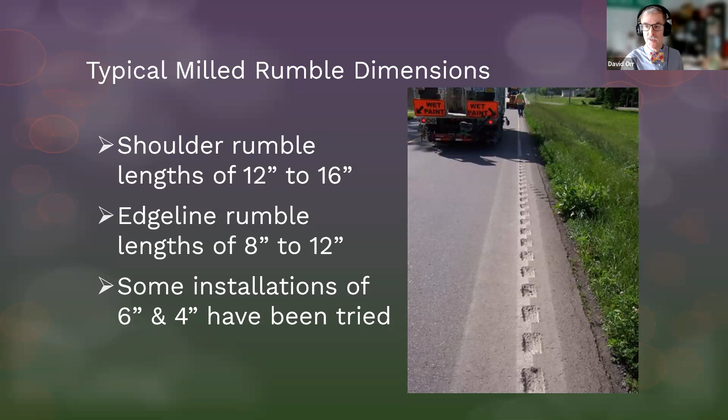Now you can actually put the edge stripe right on top of the edge of it. In this case, you can see the difference in the rain. I'll be honest, I actually prefer it to one side, the driver's side of the rumble itself. So you would actually put the edge line over to the left side there if you were driving along the roadway. But it can make a big difference and holds up pretty well in the winter, as long as the pavement is ready to take that rumble.

In terms of the value of the crash modification, those are pretty darn good crash modifications for just putting in a rumble strip, with pretty low errors. All crashes down by over 10%, opposite direction crashes over 20%, and the ones with injuries or worse, 25%. That's a pretty good bang for the buck. Now there's a little more error with the injury one, and you've got to put them in the right places, but there's a lot of value in putting down rumble strips.

And if you're wondering and worried about the maintenance of the pavement, some agencies have started actually chip sealing or sand sealing over the top of the rumble. It's a little less effective, but it can help in terms of protecting the pavement. So that's something to keep in mind as you're going along.

Now, this one ought not to be controversial. But how many of you have heard of or used Safety Edge? Raise your hand if you've heard or used Safety Edge.

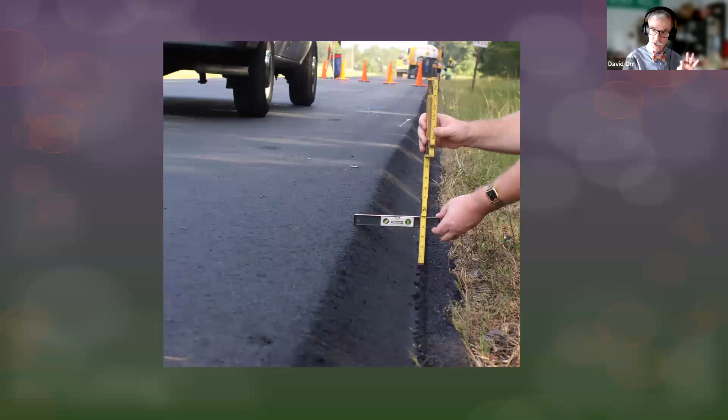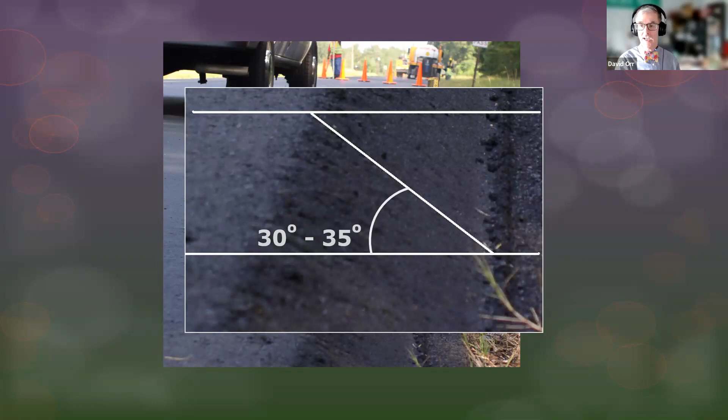So what they came up with was this thing called the safety edge, and we'll talk a lot more about this next week. The idea is at the end of it, you're going to have a 30 to 35-degree angle in the asphalt paving. It's built into the paver, so it's got most of the compaction done just by the paver's vibration. It actually protects the edge of the pavement and lasts longer, so it's actually more durable.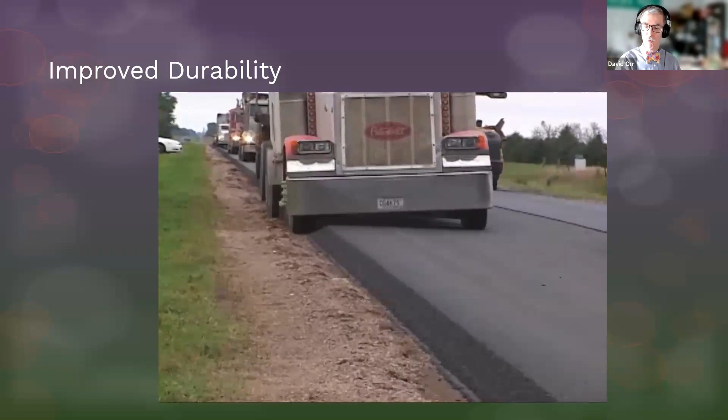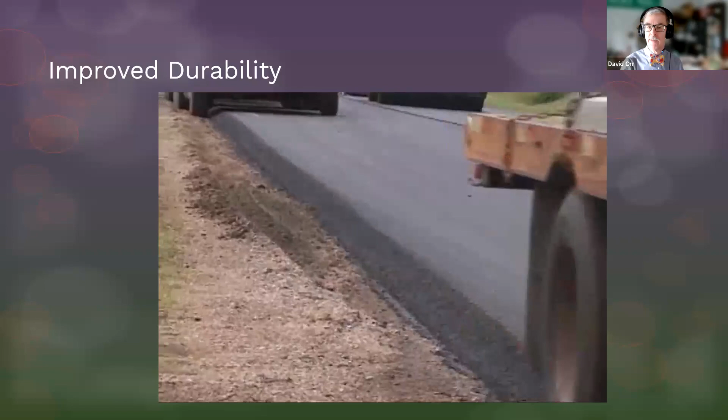To illustrate this, watch the video, and again I'll show more of this later on. You can see there's almost no damage to this pavement, which is brand new, from dump trucks driving over it. If you did that on a normal edge, it wouldn't survive at all. So a safety edge can be really valuable and gives you more time to get that shoulder backed up, though you still want to back up that shoulder if at all possible. So keep that in mind. It's definitely something you want to add to your list of tools.

So just based on what I've told you now, we'll refocus on this more, but what do you think the two benefits are for the safety edge, or as New York State calls it, the safety wedge? You get to select two, so let's see how y'all do here.

Yeah, very good. It's improving durability and improving safety, but you still have to back up the things, and it doesn't save any asphalt. It really doesn't add that much. In fact, it adds so little that if the price is going high, you need to talk with your contractor. I met with New York Materials a couple weeks ago, and they like Safety Edge as well. If you're finding contractors charging you extra above literally 1% or less, you might want to talk to New York Materials. That shouldn't be happening, because it's actually easy for them to do and makes a more durable pavement for them.

Let's go controversy time. This is even more controversial than rumble strips. Okay.

Now, raise your hand if you love roundabouts. Raise your hand. Okay, good number of you. Magically now, Jody or Amanda, lower the hands. Now raise your hand if you hate roundabouts. Okay, so some of you hate roundabouts. By the way, the public on the whole doesn't like roundabouts. So it's just something we have to deal with. It's a reality of it.

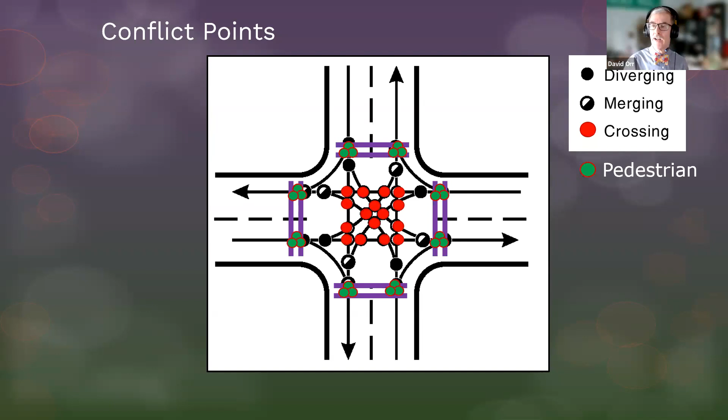And then pedestrians—there are 24 pedestrian conflict points. Vehicles coming from the left, from the right, from straight. And yes, traffic lights can help, but there's just a lot more conflict points. So the reason we like roundabouts is we've reduced the number of vehicle conflict points down to only 8, and the pedestrian conflict points down to 8 as well. And if you do it right, pedestrians only have to cross one lane at a time, and it should be set up so you design the roundabout thinking about the pedestrians so they can cross safely. It is hard to go backwards if you've already put a roundabout in that wasn't designed for pedestrians, and then try to put the pedestrians in it. You actually do need to include them when you're putting them in the first place. We'll talk about this more if you're interested, but again, we're talking about roadway departures next week.

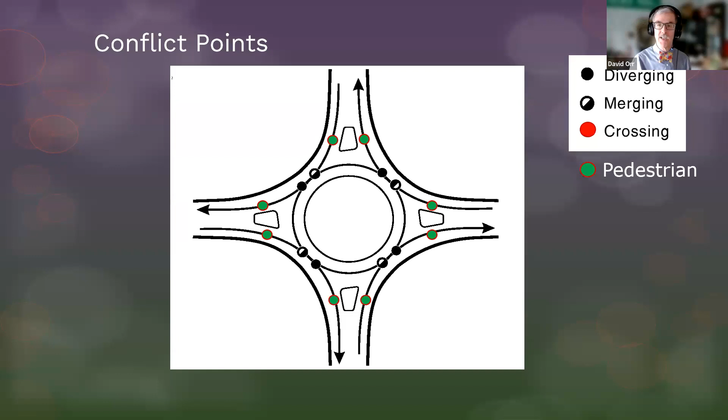Now, we'll see if the video plays today. It was fighting me this morning. Yeah, here we go—it's playing today.

Yay. Now, this is an intersection that is right on the edge of traffic volume to let people get into the roundabout. There are rules for where roundabouts work and don't work. They're a great tool, but people have to get used to them. There are people I know who would never be able to get in here because they just can't get into that space. So it's something you do need to think about.

A well-implemented roundabout can be very, very effective. But again, there's a lot of people who say, oh, I hate roundabouts. And I know people here in Ithaca who don't like the couple roundabouts we have. It's going to be an education issue—it's going to take some time. And there are always going to be those people who just, for whatever reason, think, well, that's the way we've always done it, but really haven't done it that long with standard intersections.

So it's something to keep in mind. It's going to definitely take some education to do that. And they can be very effective for hotspot intersections or places where we've got capacity problems.

Now, mini roundabouts are pretty cool. We have a few of these here in Ithaca. Seattle is the place that started them first in the United States. These little mini roundabouts where they literally just put a small island and the vehicles go around them.

Now, the thing about it, they work, but you got to think about the traffic that's using the intersection. So you really want to check a turning template, either electronically or the old plastic ones, and see if vehicles can get through here. The 3 vehicles you got to worry about the most: fire trucks, snow plows, and any commercial deliveries. And you do need to be able to get those vehicles around, and there's a lot of movement.

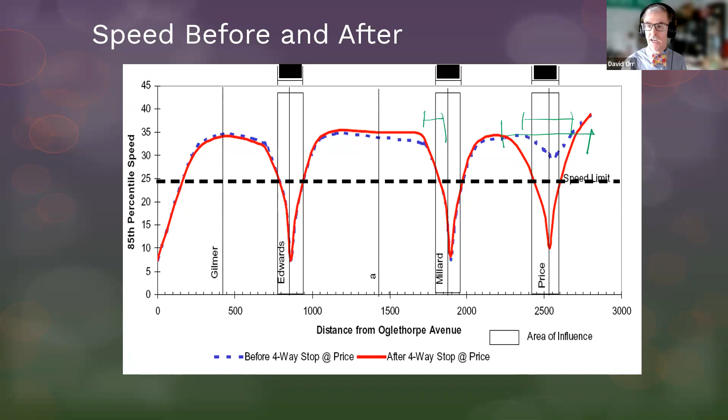Here, the deceleration-acceleration distance grew, and there's a lot more of it. And so people still aren't stopping, they're still going about 10 miles an hour. So artificial signage can actually make things less safe. Be careful about that if you're putting up intersection signs.

And yeah, there's a lot more we could talk about. We could talk a lot about pedestrian and bicycle items, but again, we've only got an hour, in other words I've got about 5 minutes with you. So I can't get into these in too much detail, but I do want you to understand there's value in thinking about these things.

So for instance, a crosswalk. Watch what happens: this intersection feels very unsafe. At a crosswalk, big difference.

Technically, a pedestrian has the right of way at this intersection in New York State. Technically they have the right of way, but nobody knows it. So if you really want pedestrians to cross, think about the value of the stripes. And from a driver's standpoint, you might not see an intersection, but if it's got a stripe, it's a lot easier to see.

So think about the pedestrians and bicyclists, how they interact, dealing with intersections. And of course, if it's a mid-block crossing, absolutely you want some good signage. You might even want to put up not just signs, but rectangular rapid flashing beacons that, when you push on them, actually light up so you can see them flash.